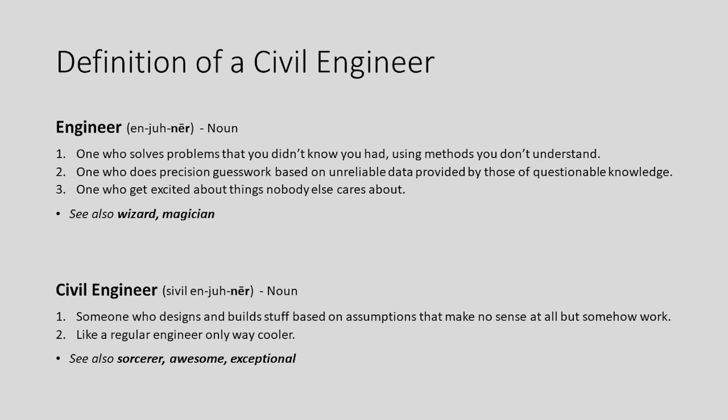There's a whole lot down here probably. Maybe a few Tech people in the audience. But one thing, to do it that long, you got to kind of enjoy your work, right? So you got to have a little bit of fun once in a while. I'm a civil engineer. So what is a civil engineer? Let's have a little fun here. One who solves problems you didn't know you had. One who does precision guesswork, right? You guys recognize that one? And you get excited about things no one else really cares about, like bridges. And, of course, you know that one, right? But that's an engineer. What about a civil engineer? If you look at my card, it says engineer because I do a lot of things. So what's a civil engineer? Basically, design and build stuff based on assumptions that somehow work. And we're like any engineer, only a lot cooler, right? But we got to have fun, too. And, of course, we're not with railroads.

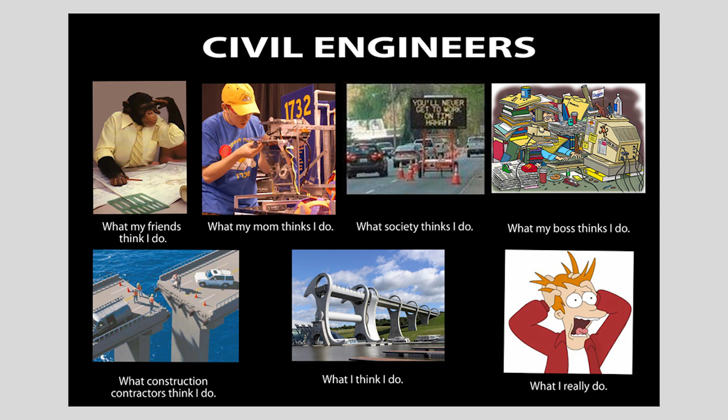Let's get started on this. I'm going to try to get back through this. Interesting situation we had. Let's go back to the cover slide. Where's Dickinson County? We're not by Detroit or Lansing. I was asked earlier, how often do you get down to Detroit? Almost never. It's like an 8-hour drive to Detroit. Okay, we're up in the UP. It's got a neat little dialect. If you want to speak Yooper, say eh a lot, put an S on the end, and never use the words to or the. So go mall, go store, you guys. It's a neat little dialect.

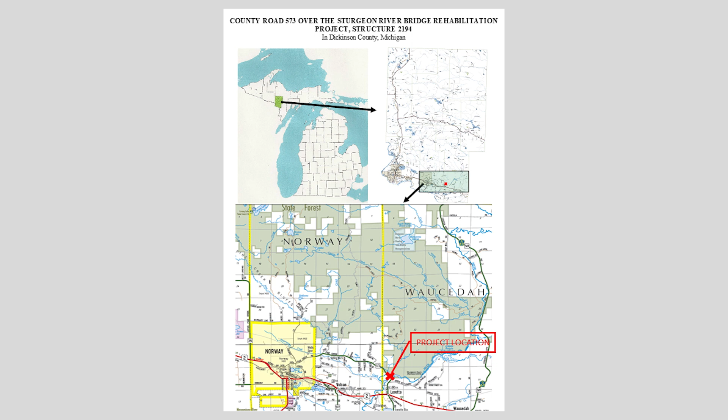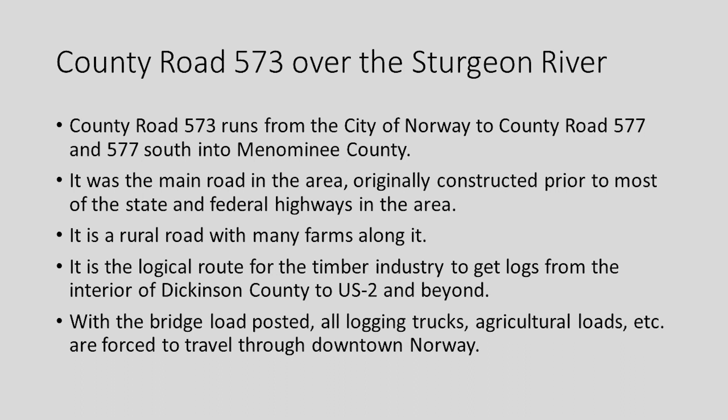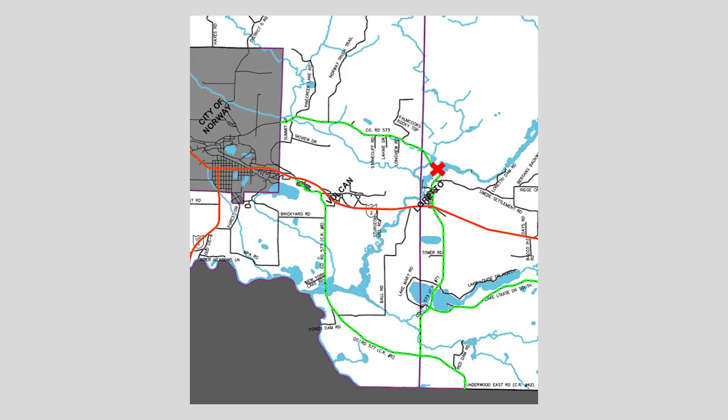That's where our structure is. It's in the southeast part of the county, right up US 2. A little bit about 573, the road this is on. It's an old road. It runs from the city of Norway to Menominee. Basically, it serves logging. Logging's our big industry. Mining used to be, but the mines are pretty much all shut down. So logging is it, and some agriculture. The green line's 573, which drops into 577, and 577 drops all the way to the Wisconsin line. The red line's US 2. The X is the bridge. That big gray or off-green area is the Copper Country State Forest. A lot of little trails come out of it to 573. Logging is huge.

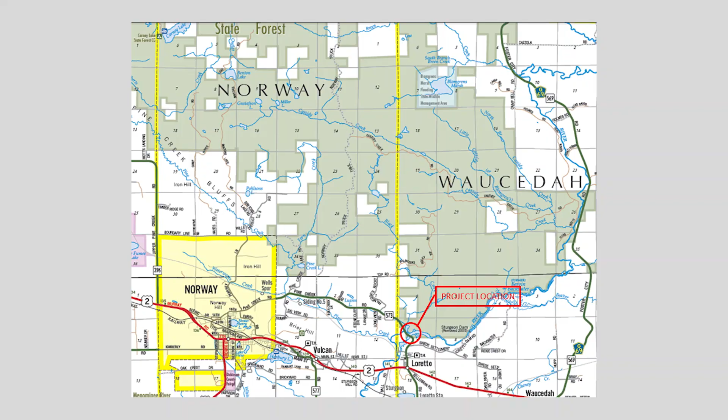See the yellow blob called City of Norway? Well, when the bridge is posted, guess where all the log trucks go? City of Norway. Right downtown's the only other truck route. I've been in Dickinson County for 11 years, and every year at least 4 times I get the mayor or the city manager in Norway: get the damn trucks out of our city, will you open your bridge up? Well, we finally did. A little about the old bridge, built in 1945. It doesn't work for every bridge because not all bridges are built this way, but it's a kind of cool little project.

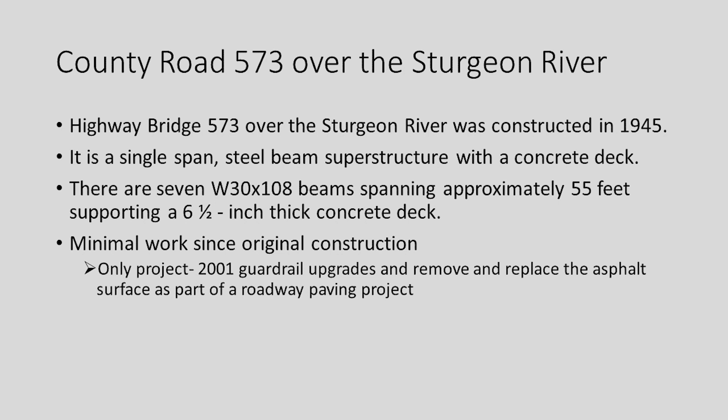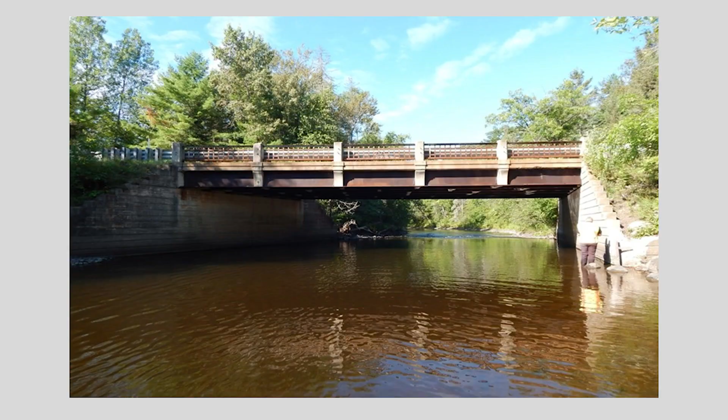The only thing we can find in the records is that in 2001 they repaved the road through and did some guardrail upgrades, but really never touched the bridge. So the bridge is the same as it was in 1945, more or less. Driving up to it, this is what you see from the south. Cute little bridge. Kind of neat underneath. These concrete diaphragms are a little unique, specifically with the holes in them. Yeah, it's old. You can see the deck drains had no extensions, so there's a little bit of delamination on the bottom.

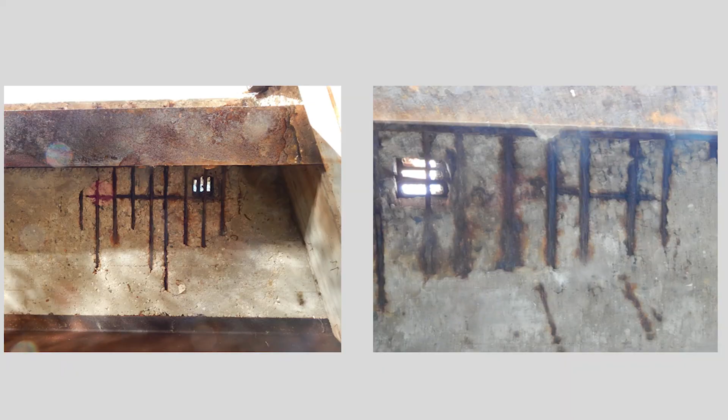This is an interesting picture. Yes, it's load rated. That's Michigan load rating. I know for some of you guys, 80,000, that's the federal standard, which is 40 tons. You can see there, 42, 50, 57. That's actually load rated in Michigan, believe it or not. I know some people don't think that is, because we have these huge, huge trucks.

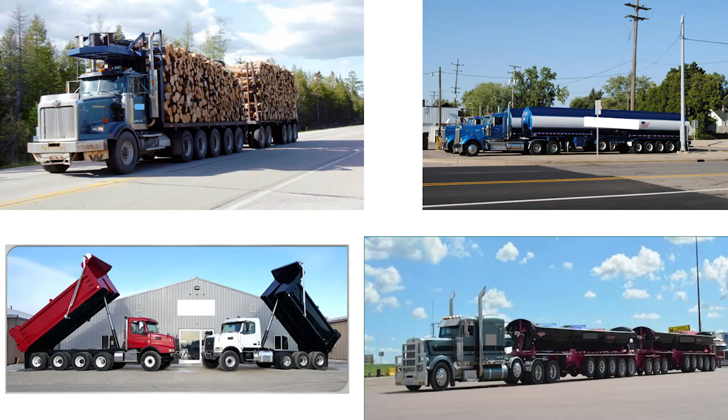Yes, and it's quantified in law that you can drive 164,000 in Michigan. Makes being a bridge engineer pretty tough. Well, that's just one of my many hats. I'm the county engineer, so bridges, roads, everything.

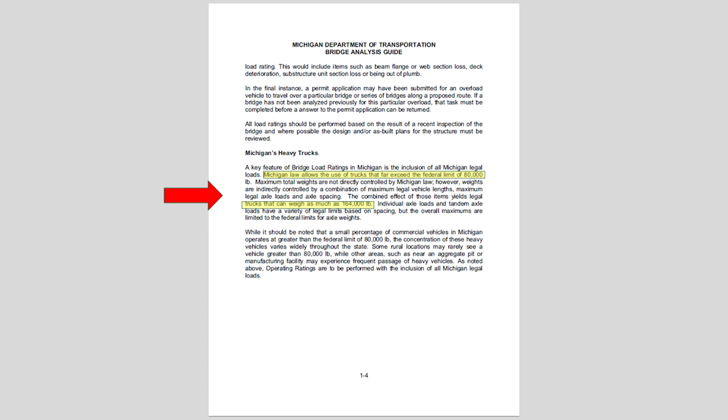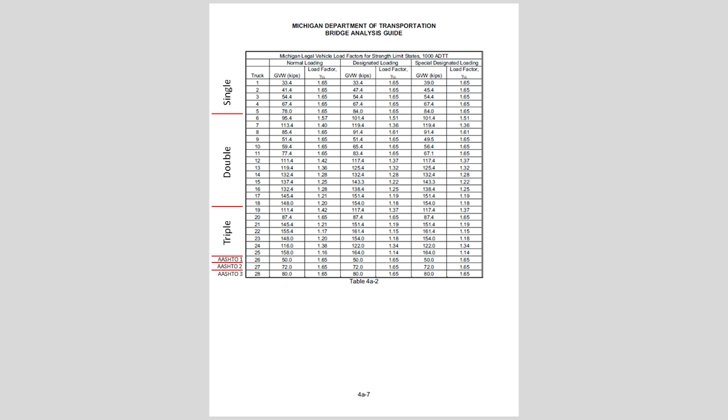We have 28 different truck combinations to run. So if you run your load ratings, how many of you guys have 2 or 3? Just the AASHTO? Try running 28 every freaking time you got to do something. And there's a lot of different combinations. And plus you have the overweight states.

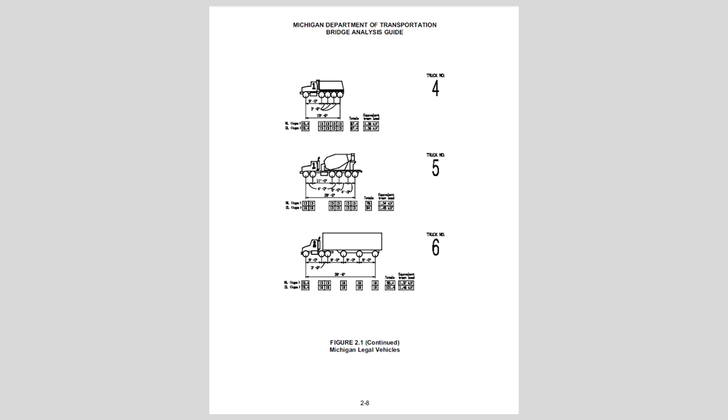These are overweight states. Okay, we have Class A, Class B, Class C overweights. And you see the difference here is now you can get up to 60,000 on your axle. A little heavy, huh? Anybody else have 60,000 pound axles allowable? This is stuff we got to design for in Michigan. Makes our life a little more miserable. Plus throw in the weather, freeze thaw, snow. Not a fun place to work. Well, it is a fun place to work.

Let's put it there. So anyways, how did we come about with this job? And you guys, I'm sorry, I might go a little over, just a little bit. Just be aware. Just got a late start here.

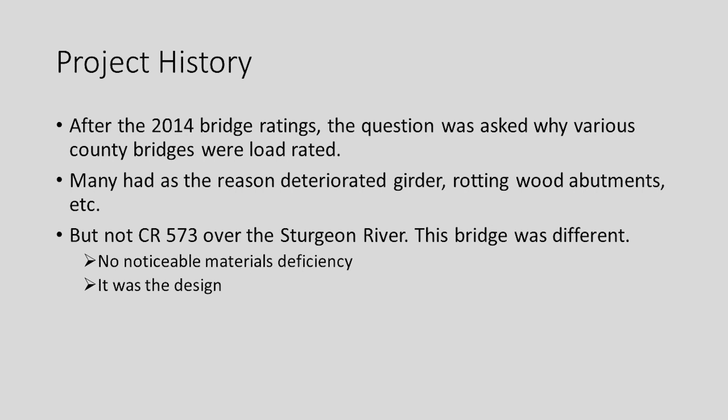Basically, I got Dickinson County in 2011. I do all the bridges. I do the inspections. I do everything up there. And after the second cycle, I started asking the questions, why are these different bridges load rated? And everyone was like a bad abutment, bad deck, bad this, bad that. But this bridge was a little different. Nothing really, other than the fact it was kind of no paint, was really bad on it. And you saw a little bit under there, by the deck drains. Diving into it, the design is why the bridge is posted.

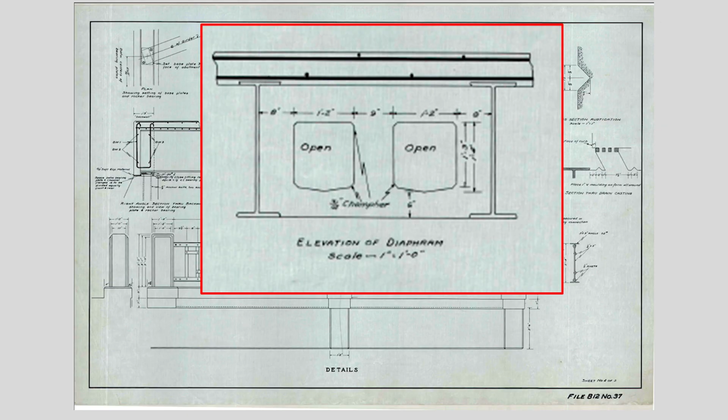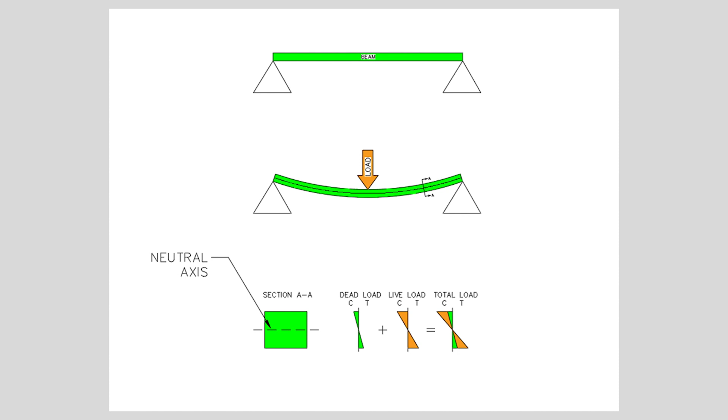Here's the actual bridge plans from 1945. Anything in here that looks like might be an issue? Yes, it's only 5 pages. That's the whole set of plans. Wouldn't it be nice to write a 5-page bridge plan nowadays? Most of them are 100 pages, seems like. This little detail here might give you a hint. That's the section. Or maybe this guy, the diaphragm, might give you a hint.

There they are. What's missing? Anything? Nobody? How about these guys? Shear studs. There's no shear studs in the bridge. That's a picture of a different bridge, 577. But now I want you to look at those real quick. What do they look like? Little nails, right? Notice there's no thread on it. Notice they're not being stretched right now, right? They're not in tension or compression. We'll come back to that in a minute.

Let's play a little bit. Let me turn this over here. You guys, I mean, you gotta have fun, right? I like to have fun at work.

Here's our beam. Put our load on it. And of course, you guys have probably seen this before, right? Compression on the top, tension on the bottom. You can tell by the little lines get tighter on top. And if I'm talking to the choir, you guys may already know this stuff, but it's still fun to play, right? What else? And you can see that by the strain diagram. Tight compression on the top, tension on the bottom.

Let's add 2 beams. Pretend the load's on it. We gotta go quick. Now, if it's unrestrained, you can see the ends pass, and they each have their own tension and compression zone, right? You guys are bridge engineers. Well, maybe you don't know. We'll pretend you don't. Humor me. So now each beam has its own tension and compression zone, and of course you have the neutral axis where there's no strain because the tension goes to compression.

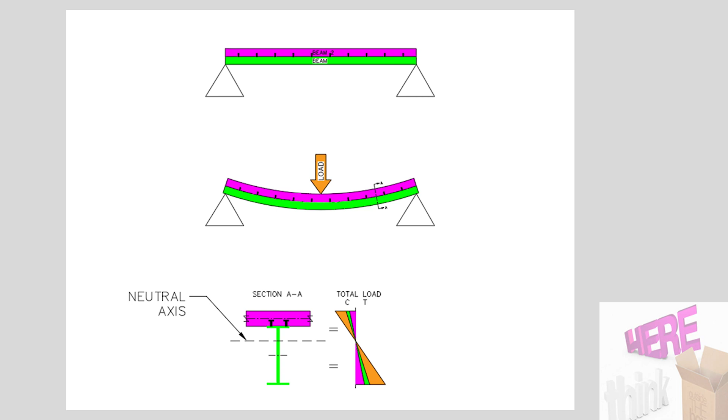Let's go one more time. Let's glue them together. Put some nails in there. Shear stud it. All of a sudden now, get the lines lined up right. They act together. So I'm putting a little force on the ends so they don't slide. Really, what happens is the ends slide, right? The top slides on the bottom. So if we put them together, now you can see the lines all work together. Basically, the top beam is fully compression and the bottom beam is fully tension.

Let's apply that to bridges, right? It's kind of fun to play with foam and trucks, right? You need to play at work once in a while, okay? I mean, if you want to work 30 years in engineering in the public sector, you got to have fun once in a while. Just the way it goes. And yes, I am a clown on the weekends too, okay? So anyways.

Here's our bridge. No shear studs. What happens? We talked really quick about the tension and compression. If you guys want to talk more about that, we can talk later. No shear studs, not tied together. The deck acts independently of the beams, right? So here's a tension and a compression side, same with the beam. Neutral axis through there. What do we know about concrete? Let's go back to materials. Anybody? Concrete is really strong in compression, really weak in tension. So what do you think our limiting factor was on this bridge? It was the deck. That's why it was load posted.

Add in the shear studs. All of a sudden, the neutral axis drops. Because they're locked together, it works as composite.

The concrete's all compression where it's strong. The load rating goes through the roof. Okay? I mean, that's a little basic. It's preaching to the choir for this group, but maybe you don't know. So that's the detail we used. That's the details in the drawings.

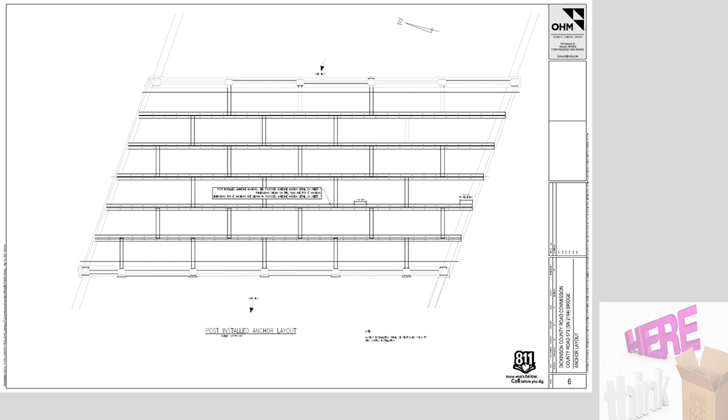Yes, there are 300 shear studs they drilled. They don't need that many. But working with a state oversight agency, if you want their money, you follow their rules. They didn't trust the project was going to work right. Really, in the real world, think about it, where is the motion at? It's on the ends, right?

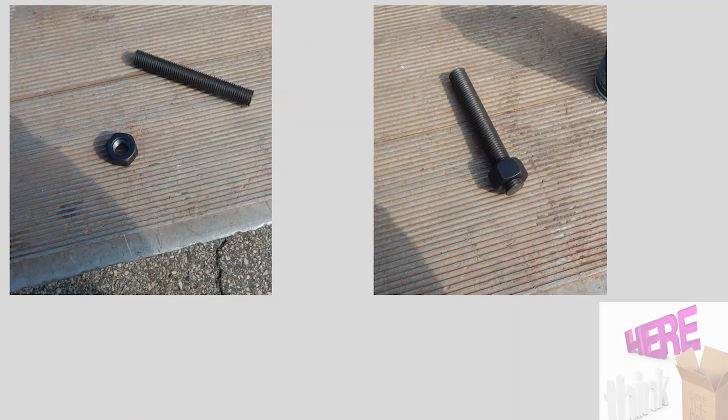So on a real bridge, and I worked for the state of Illinois, they were pretty smart about this. We put a lot of studs on both ends and very few in the middle. They said, no, you got to go across the board. So 300 holes, about 2 feet apart. This little guy. Yes, I brought examples. That's a shear stud. That's what we did. 7/8 threaded rod with a nut and a washer.

Don't agree with the washer. We'll get there in a minute. We're engineers. We went to college to learn how to think, and I'll get there in a minute. The washer is someone not thinking. But using their money, their funds, we had to use it.

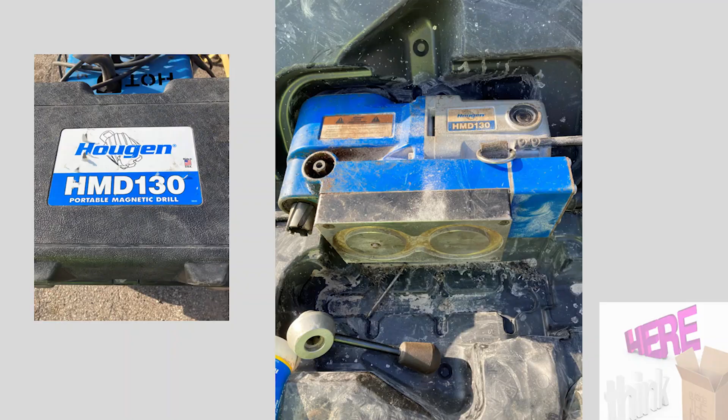That's the workhorse of the deal. That little magnetic drill. Makes little cores like this. The handle is actually off, so you can see how it works. Kind of gets up there, and you see the squirt spray bottle. You know, it's oil. Of course, when you're cutting steel, you got to oil it. The guy's looking at me. He's covered, you know. Of course, makes little cores.

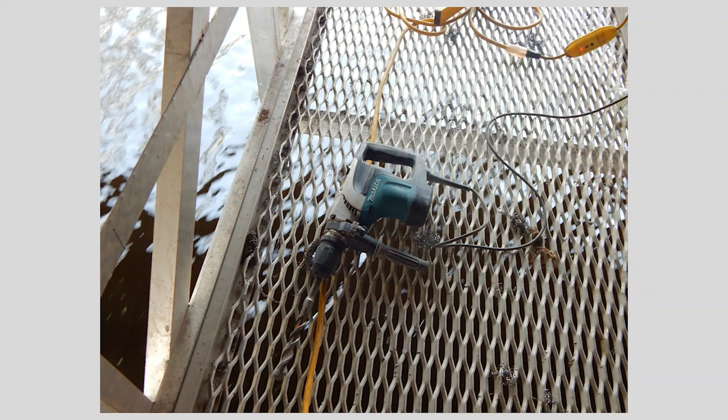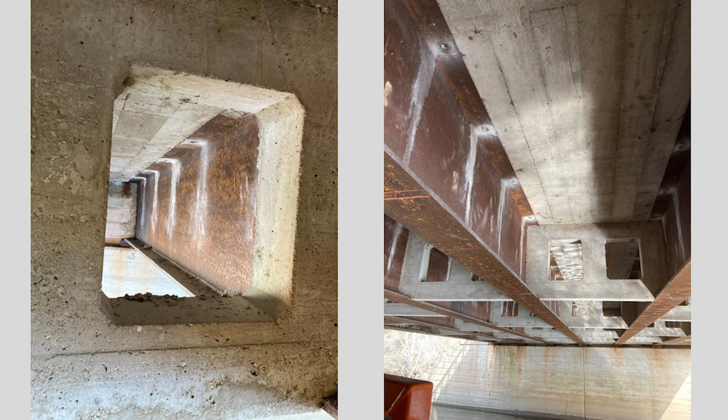The other part was the big Makita. It was the big hammer drill. Once you get the hole drilled, you come back through, drill into the deck. Now, the deck is 6.5 inches. We went about 4 inches into it. And there's some neat pictures. Those diaphragms are kind of cool, I always thought, so I took a few neat pictures looking through them. This is all the holes. Then we come back to our 7/8 threaded rod. A little bit of epoxy grout, and that's what we got. Pretty straightforward, right?

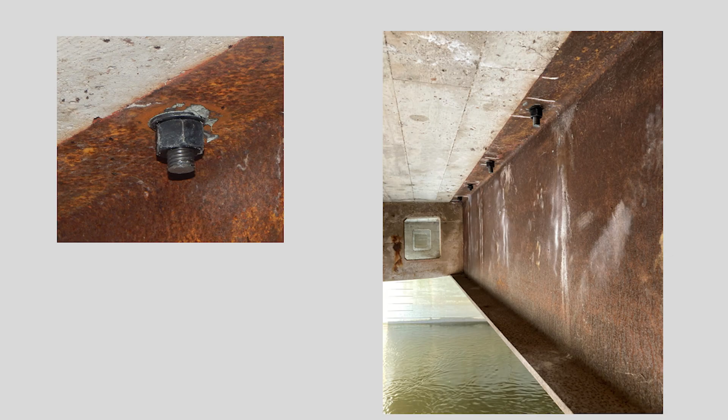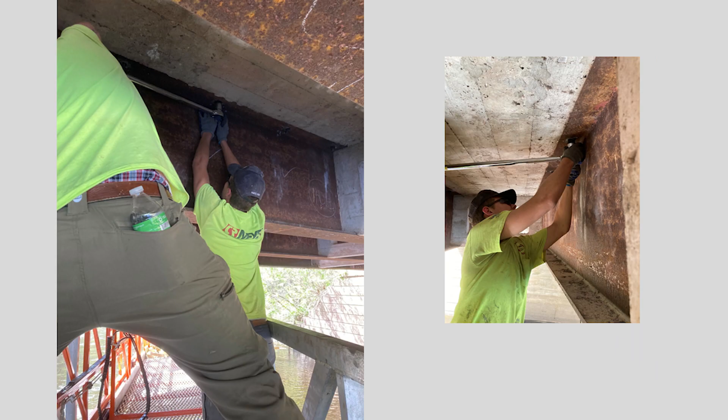Everybody seen this? Sometimes we just blindly, right, now we're engineers. I got my engineering license in Michigan, Illinois. Got to think, right? This next slide still pisses me off to this day, okay? Because we had to use other people's money, we had to follow their rules. What the freak are these guys doing? Anybody know? You got a big torque wrench. They're putting a torque on the nut. That's why there's a washer there.

Why do you need to put a torque on a nut on a shear stud? You're not trying to tie the beam into the deck, you're trying to keep the deck from sliding. When a metal is in tension, remember we had a class at Tech called Smash Lab. It's actually Strength of Materials 301. 7 in the morning, the only 7 o'clock class I loved. You go in there and you break stuff. Great class. But one of the things I remember is a metal in tension is weakened in shear. That tension actually weakens the shear.

They demanded we put 250 foot-pounds on these things. Okay, actually, I talked to the inspector. We wrote it up that way. Don't tell anybody from MDOT in the room. We don't need that because we're trying to stop the shear, not the strength. The original design was a tack weld on the nut. Not a full weld, just an 1/8 inch, not to get heat into the beam. And then a tack weld here to the stud, just to hold it in there. The grout is only there to stop it from sliding.

Now, if it's tack welded and say the grout starts to fail, guess what? The void is still full, right? It's not going to move. Using that torque method, the grout starts to crack over time or whatever. This is just going to drop right out. But it's the way it had to be to get the funding. Sorry, I get a little angry on that one. You know, it's just not right. But it's what you got to do sometimes to get the funding.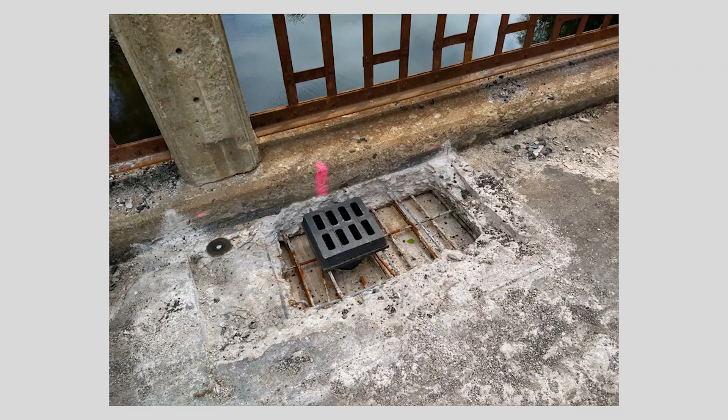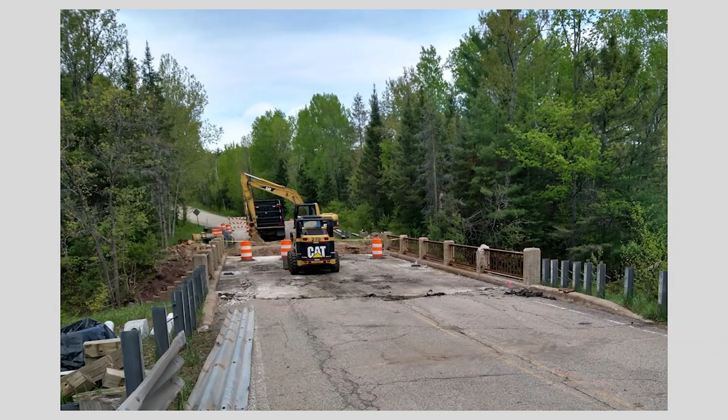So, other work we did. Deck drains, we improved those. That's pretty small still, but it's twice the size of the original. And as you saw in the pictures, there was a little bit of spalling from the bottom because there was no downspout, so we replaced that. Now, you heard someone say that in Michigan we don't do asphalt decks. BS. 3/4 of the bridges in my county have an asphalt cap over the concrete. I'm sorry, guys from Michigan. Counties do this, the state doesn't. That's the way it is.

This picture kind of pisses me off a little bit too. I lost $5 here. Okay? Because in the original bid, we only figured there's a little bit of delamination around the deck drains. Well, there's an asphalt cap on. I chain dragged the whole thing. I learned something here. I've done this 30 years. You still can learn. Inspector looks at me. Man, he's only been doing it about 15 years.

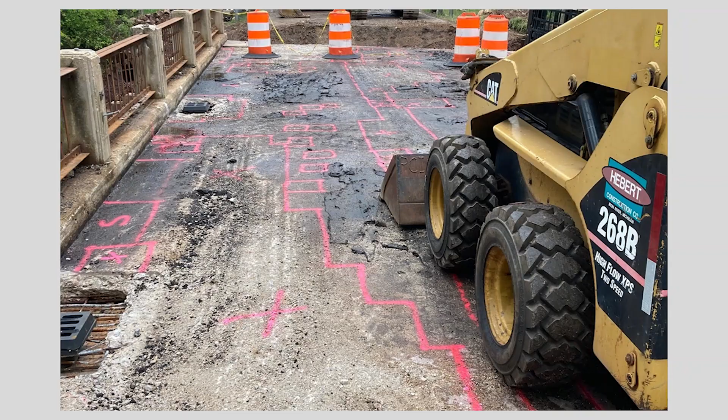And he goes, I bet you that if we take the asphalt off the deck, we'll find more delamination. I tell him, yeah, you will, maybe 5%. He goes, bet you $5 it's over 10. I thought, damn, man, I chained this myself? No way. So I took him on. We chain dragged it after, and we found 25% of the deck was delaminated. Guess what? I lost $5.

So we did a little bit of structure repair in the fascia. Didn't need it for regular loads, but for the overweight classes, we had to do this. It's all under the deck drains. If you look where the deck drains laid out, those fascia beams where the deck drains dripped on, a little bit of repairs. And that's what we got, and we're done.

Is there a way to zoom in? I'm not going to do it. We're short on time. I'm trying to catch us back up, so we're not going to go in there.

But anyways, if you zoom in the picture, you actually can see the bolts from the flange repairs and beam repairs. Cute little bridge.

So, what's this? Let me go back over here. Done playing. Back to get serious again for a few minutes. Am I catching us back up on time? I'm trying to get through this pretty quick.

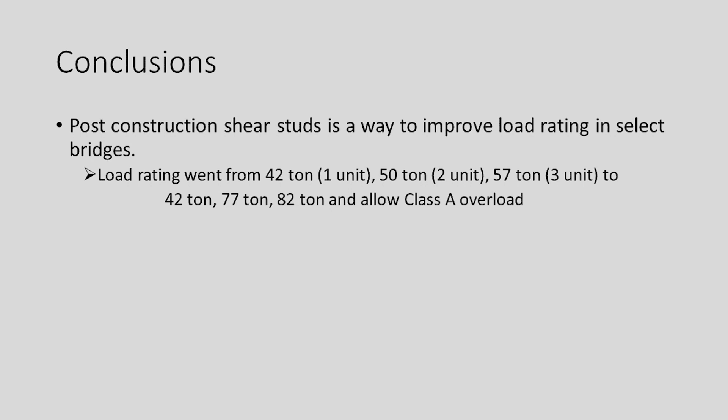Good. Okay, post-construction shear studs. We improved the load rating a lot. Now, some states don't do this. In Michigan, we do. We've got a 1 unit, a 2 unit, a 3 unit. That's that sign that has the 3 little trucks on it. The original is 42, 50, 57, which in some states is already an overload. When we're done, 42, 77, 82. Now 42 is the heaviest single unit truck in Michigan. So, a Class A overload, we're good for.

This was a cheap project. Back when we first got approved, 604,592 was the cost of the project. Of that, 407 roughly was on the bridge. Another almost 200,000 on the road work. We did a little bit of approach work, a little bit of paving, and some guardrails and stuff like that. So yeah, it was higher than estimated back in 2017 when we applied for the grant. It takes a little while to get through the process.

At that time, we compared it to a new bridge. New bridge in 2017 was $956,000 was the estimate. Plus a lot of headache with permitting because more than likely we would have had to expand the abutments to match the water flow and a few other odds and ends. But with this, we didn't raise the low beam. We didn't change the weir on top. Just got it through under the maintenance exception. So no DEQ or EGLE permit or anything like that. EGLE is our DEQ, Department of Environment, Great Lakes, and Energy. We don't have a DEQ in Michigan, it's EGLE. But anyways, because we got the maintenance exemption, nothing there.

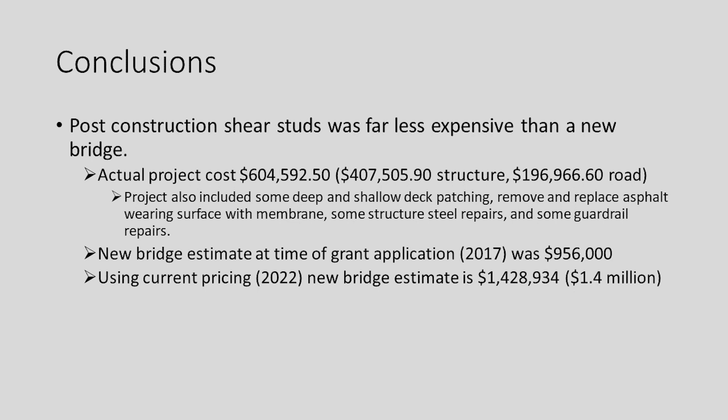2022 pricing. Now everybody knows pricing's gone up through the roof in the last couple of years. Running the 2022 bridge scoping and average unit pricing, it's a $1.4 million bridge now to replace. That's not considering the expansion, making it bigger. That's putting it back to the same size, which probably would have to get another 15, 20 feet longer to match current EGLE requirements. So we saved a lot of money. Let's be blunt. We saved a lot of money. Is it going to last another 30 years? We hope so. That'd be over a 100-year-old bridge.

It's in pretty good shape. These are our partners. OHM helped a lot with the design. I put a lot into it, but I didn't have time to do it all. Coleman Engineering helped some with the inspection. We had an issue with the original bid. We had 0 bidders on it, so we combined 2 bridges into a mini bundle. OHM had this one, Coleman had another one, and they worked really well with OHM, combining items and bids. And because their work was so good, and OHM didn't have the time, they just hired Coleman to do the inspection. It's kind of cool. MDOT did the oversight.

Sorry, guys from MDOT. I don't mean to badmouth MDOT, but it just pissed me off how you guys forced me to torque those things when it doesn't need to be done. Hebert was our contractor.

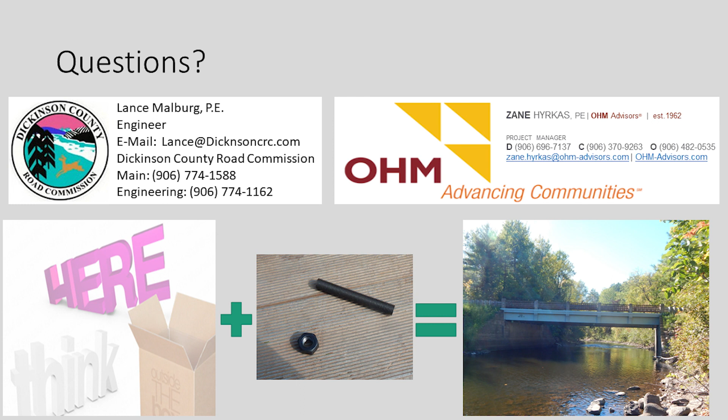So it went well. It's all thinking outside the box. In '14 I asked the question, what can we do with this? The only answer was replace it. And like, no, there's other things you do than replace a bridge. You can fix them. So with that, I went a few minutes over, but I really tried to kick through that as fast as I could.

Thank you, Lance. Appreciate it.